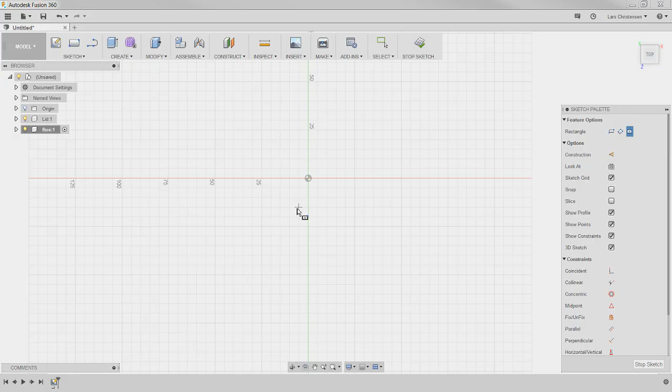If I want to do a center rectangle, instead of going up into the menus, I could just hit S and snap into the origin, and let's make this one 100 by 120 millimeters. We're gonna make a small little comfortable box here. Hit enter and we get it fully enclosed.

Q, press pull, and let's give this some thickness. Let's make it 25 millimeters.

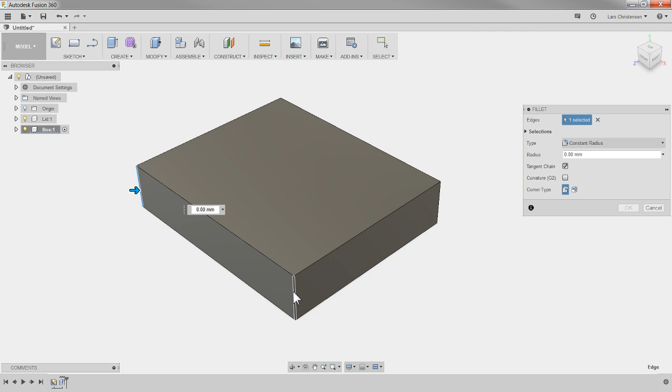Now that S key is aware of where we are. Before we were in a sketch environment, we got the center rectangle, but if I hit the F key again, you will see it's jumped over to feature, so you can add different things in here. Now you'll see fillet, so I can click on the fillet tool and add an outside fillet.

So like these 4 here, and let's make them 12. That's probably fine. We could also add a fillet to the bottom.

Again, you could hit the S key, and there you'll see it's sitting right there. Select the bottom here, and let's make that 2. Now this is not much of a box right now, but I decided to add those fillets now because I want to use the shell command.

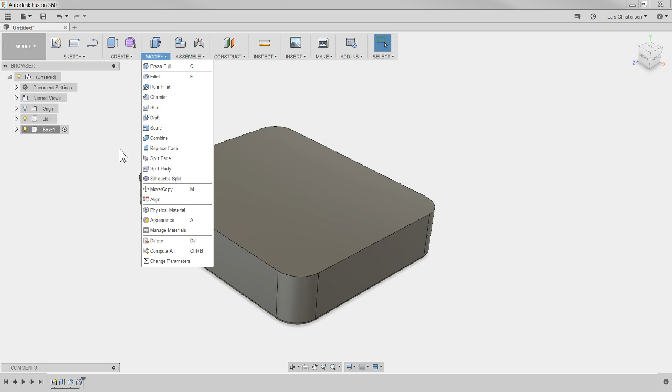Now the shell command, modify shell, but of course also S key. You could type in shell here, and you can see it's right here, and you could actually add it to that menu - now it will always be up here. So I'm going to select this face here, and then I can start adding some universal thickness to this one.

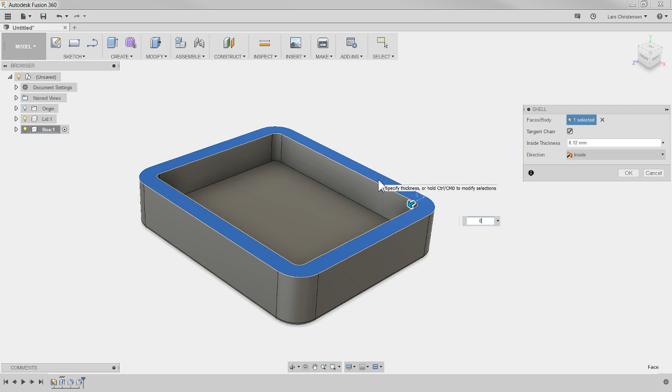Now I want to add an O-ring going around, because this is where this whole thing started - somebody asked me how the heck do you add an O-ring around here. So I'm actually going to make this thickness 8 millimeters. Now I've just added that thickness.

Now the reason that I added the fillets before - see, everything is down in this timeline - was because now you can see I got kind of like an inside radius in here.

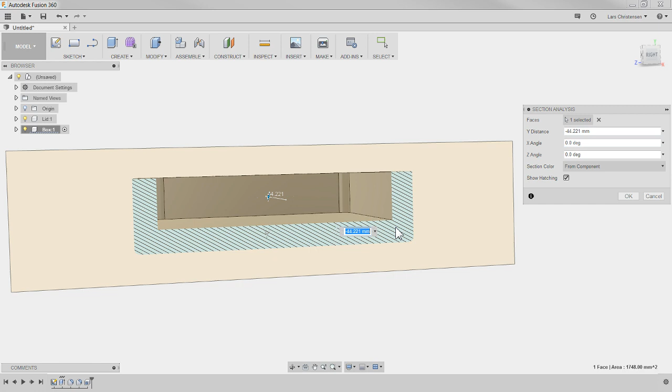Now if you go up here to inspect and go into section analysis and snap on one of these faces, we can now see that because we added that shell command, we now have a unified 8 millimeters all the way around.

Again, because everything in this timeline down here is history based, you can actually kind of break away and do new things to this.

So if I decided that I only really want the walls to be 8 millimeters thick, but I actually want the bottom to be thin, you could go in and hit Q again, and now it would actually be an offset face. You will see that in my instance here, it's only the bottom moving, but that's because I switched it around over here.

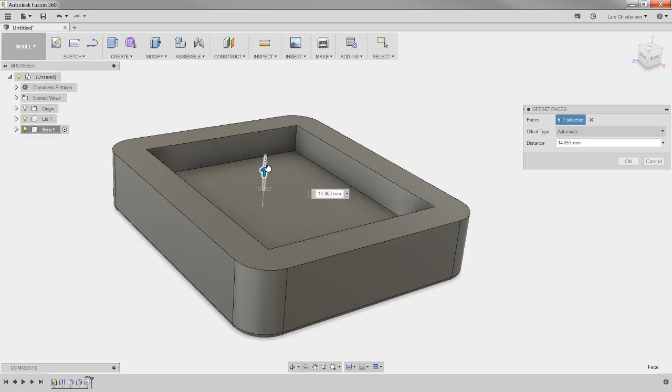Be aware of these menus over here. It normally would be on automatic, and then you will actually see that it also affects the side walls. So be aware, you can say a new offset, and now it's just doing the bottom.

So now I could go -5, and if I turn that section analysis back on, you will now see that the bottom is only 3 millimeters. The rest of it is 8.

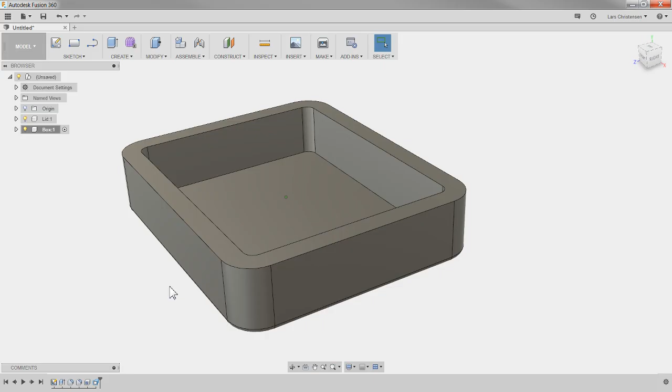So I hope that this kind of helps you think about how to work with some of this.

Now we gotta add an O-ring going around the outside here, and then I thought, well, that's pretty plain, and tomorrow we're gonna add a lid with a snap-on, and maybe sometimes there's kind of an indent in one of these. So why don't we create that?

I think you might have a tendency to look at what you have on the screen and think about how do I go from here. I don't know if this is good advice or not, but remember what has already happened in here - it doesn't have to happen from where you are right now.

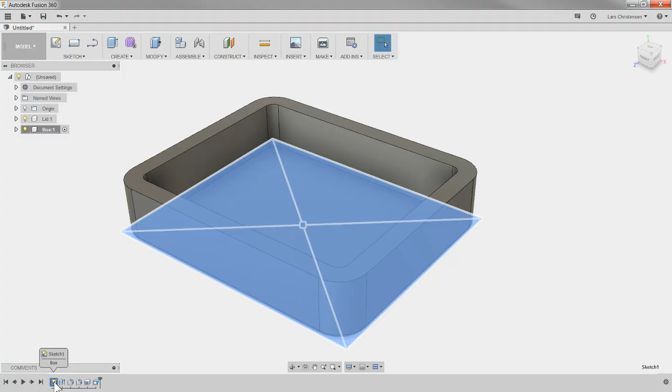If I go back into the sketch here, edit the sketch, now I'm back to the first sketch we did. If I go in here, for example, and hit the line tool and sketch a line from this midpoint to this midpoint, let's sketch kind of an indent that goes something like this.

D for dimension - let's make this, I don't know, 3 maybe? That might not be enough. 20, I don't really know, I'm just making this up.

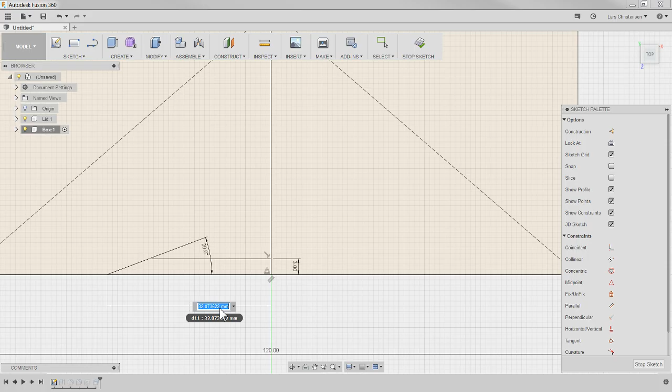So, 1, 2 lines dimension. Then we could go up here and do a mirror. Boom, boom, mirror over this line. This just saved me from drawing sketch mirror, saved me from drawing the whole thing over.

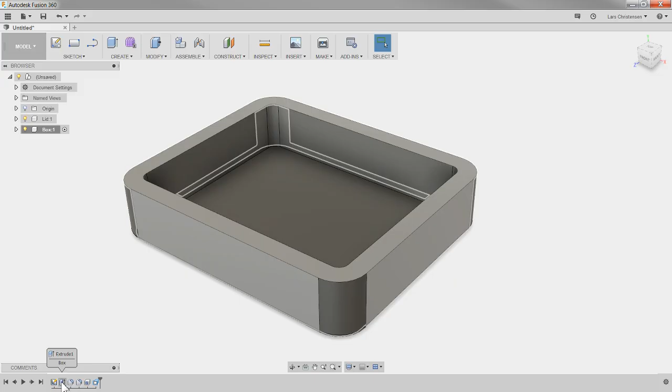Now when I hit stop sketch, nothing changed. You're like, well, why didn't anything change? Well, nothing changed because this extrusion still is looking at the original sketch. If we edit that, you will see that it actually noticed there are 2 more profiles created in here.

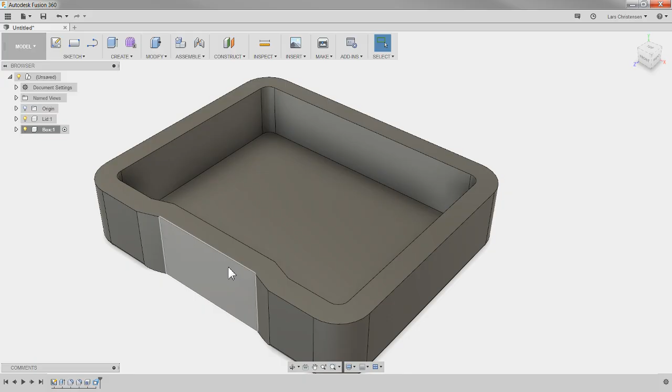If we select this in here and hit OK, then you will see that we get a nice indent here where maybe our clip will kind of fit in there, like a thumb kind of thing.

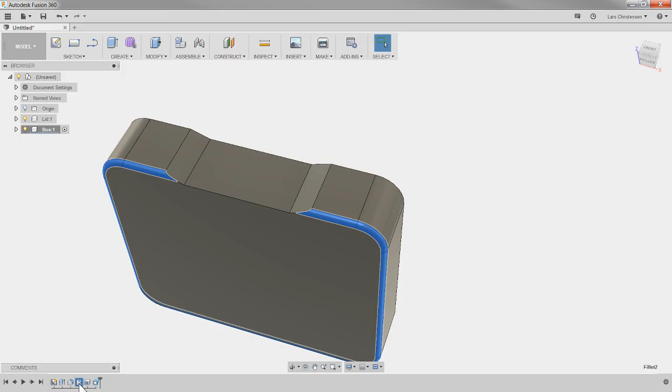Now be aware of one thing here though. Look what happened down at the bottom. Because it changed things, the fillet didn't follow along. So you want to kind of keep an eye out for those kind of things, because it lost some new edges created, and those edges were not in the original selection. Of course, you can just go in and select them again, give them some kind of radius, and then you will see that now it is how you maybe want it.

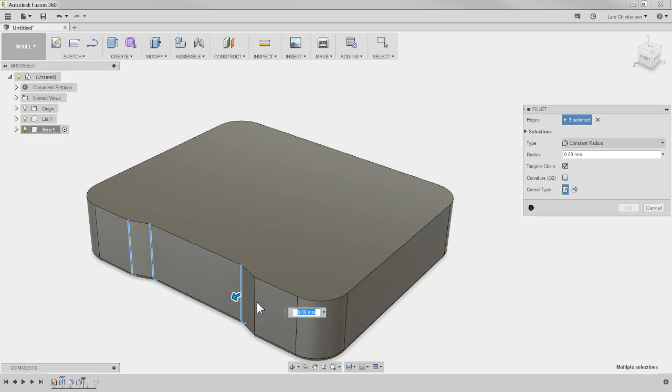Also notice we don't have any fillets on these areas here, so what I would do is move my history line back, and then we could hit the F key again to get that fillet tool, and add a couple of fillets to these here. I don't know, maybe 8. Looks pretty good. And then move forward, and we kind of got a nice fillet on that area.

Never mind. So now the reason I did that was because now my fillets are kind of bunched together in here. It's kind of nice if your timeline is getting really long, sometimes it can be hard to get all that together.

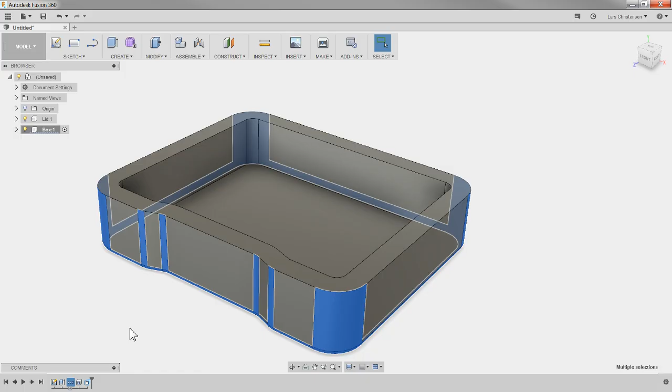Actually, if your timeline gets really long, one of the tricks is you can select these fillets here, these 3 fillets, right click, and you can actually create a group right in here. So now you have a group. We can expand the group, get the fillets, minimize it, makes it a little bit shorter, and rename it. That's maybe a little tip there, I don't know.

Another thing I had on that model that you saw before we get to the O-ring grooves: many times, if you're doing plastic parts at least, and I'm not a plastic part designer by any means, you will see that I made this wall 8 millimeters thick. That is great for where the O-ring's gonna be, but maybe you don't want it to be all the way around. You could go in and use a revolve.

Well, not the revolve, the sweep. But before I do the sweep for that, let's just do the O-ring groove, because that's kind of in the title, and now I'm almost 15 minutes into this thing. So let's talk about an O-ring groove. A couple of people have asked me about doing O-ring grooves in something like this.

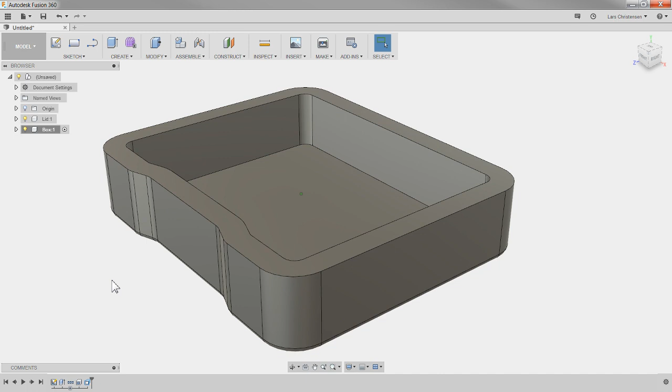So I have done O-ring grooves in the past a lot when I did plastic injection molds, but I want to make sure people understand that O-rings can be kind of tricky depending on what you're doing with them, because some of them, especially with plastic injection molds, there can be heat zones, hot zones, and different things with that. And when I did O-ring grooves back in the day, it was definitely machine shop style O-rings. We had a couple of thumb rules. I'll share those with you in a second.

There are some people in here who know a lot more about O-rings than I do. One place is the Machinery's Handbook, there's a section about O-rings if you want to be specific. Also, if you go to O-ring manufacturers, they will many times show you specifically what the sizes should be. So I wanted to make that clear, because I don't want anybody to come to me and say your O-ring dimensions were not real.

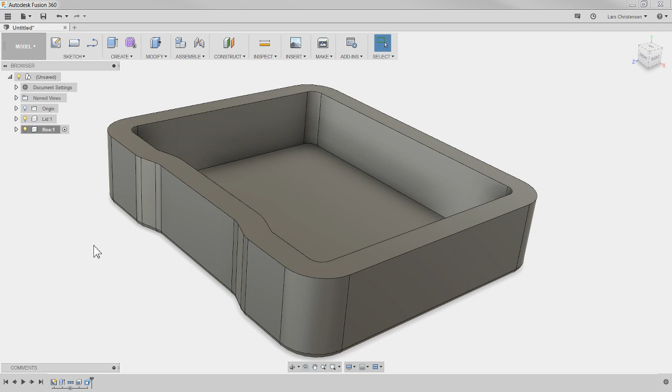So let's put an O-ring into this. I'm going to run an O-ring around this top face here. We're going to put in a 2mm O-ring. I'm going to show you a neat little trick with that too. So I'm going to create a new sketch, right in that plane that cuts through here.

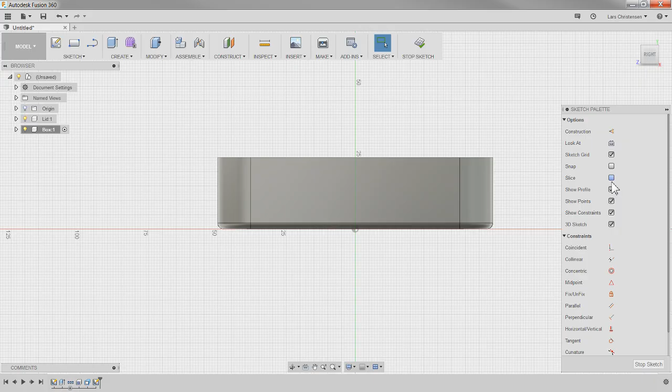Somebody was asking me on a live stream the other day what slice does over here in the sketch palette, and I said I don't really know, I'm going to use it. So let's click on it. Look at this, it actually does a section view right where that sketch plane is, so now you can actually see where you're going to sketch. Isn't that nice? I don't know how long I've been using Fusion and I haven't used that.

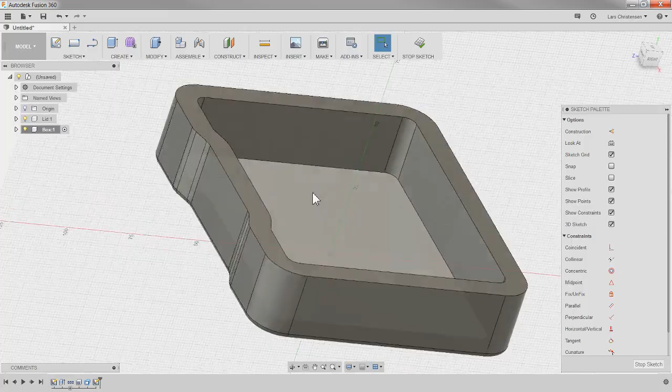So that's the slice sitting right over here. Normally you'll be sketching in the middle, because we're sketching right in the center of the box here. You can see that on the plane. Why not turn the slice option on? That looks a little bit nicer.

Okay, so let's sketch an O-ring groove. Now I'm going to do this on purpose, and I do this a lot, especially if you're fairly new to Fusion. If you try to sketch where there's other geometry, you have a tendency to snap to things you don't want, and that can be a little annoying.

So what I'm going to do is create a 2-point rectangle. I'm just going to sketch out in space out here. Now the first dimension I get is the depth of my O-ring, so this is going to be for a 2mm O-ring.

There's going to be a little bit of pressure on the O-ring on the top, normally about 20%. So we're going to make this one for a 2mm O-ring, I'm going to make this one 1.6. Now, don't sue me, this is just a good rule of thumb kind of thing, depending on what you're going to use these O-rings for.

The second is the width of it, and you would normally make the width a little bit longer, so when the O-ring is compressed from the top it has to go somewhere. So this is 2mm, so I'm going to make it 3. I looked up some different websites and they would say that's a lot, but that's kind of like my rule of thumb right there.

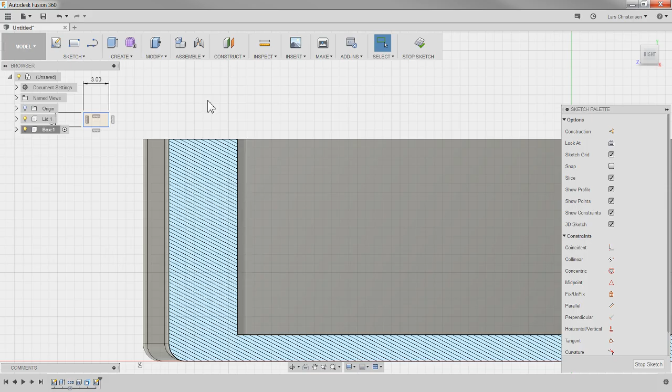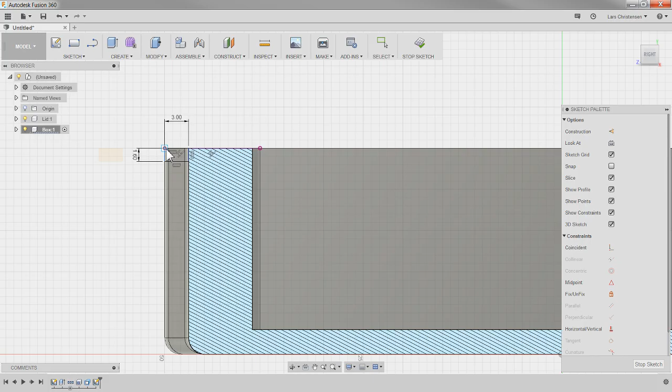Now this rectangle is kind of floating around in space, but we got things narrowed down a little bit. I'm going to hit P for project, and project that edge right there on the top, because I'm going to use that with the collinear constraint and say make this one and this line collinear. Right now I've added a relationship there, and now this thing cannot move up and down, but it can move along.

You can see, as I'm moving over here, there's going to be some triangles and things popping up, and that's because it's trying to snap into place. You can hold down Control while you're moving it, and then it will not use that.

Now I'm just going to move it all the way over here, and then I'm actually going to place a dimension from this inner edge here, from this edge to this point right there. And I'm going to make that 2.5, because my math tells me that will place that rectangle in the center.

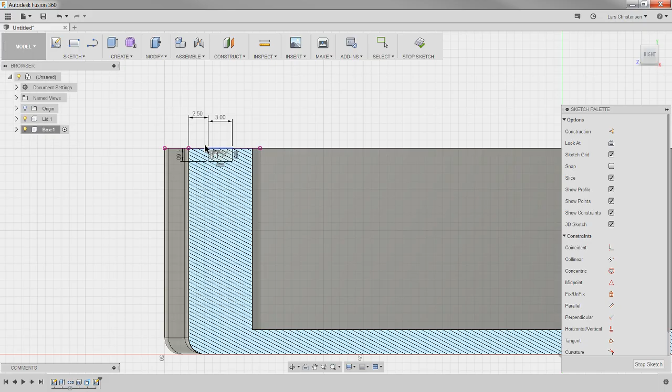I hope this was useful if you are fairly new to Fusion, to see how many times I'll draw things up if it's going to be interfering with other things. All right, I'm going to stop sketch, and now you can see that sketch is sitting in there. We're going to use the sweep for this.

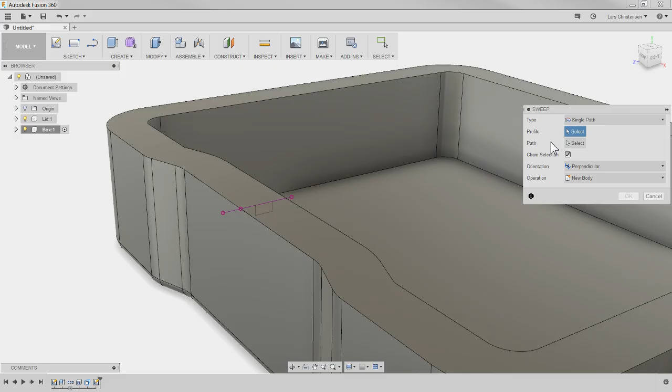So the sweep needs, well, it needs two things: a profile and a path. And if you ever watched any live streams from me in the past talking about the sweep, I might have said it needs 2 sketches. It's actually not true, so I apologize that I lied to you. But it needs 2 things.

It needs a profile, and that's the one we drew up there. Now if you ever have a hard time picking the profile, like it's kind of hard to select it through here, just hold down your left mouse button for a few seconds, and this little dialog will come up, and then you can see the profile will show up right there, so you can select that.

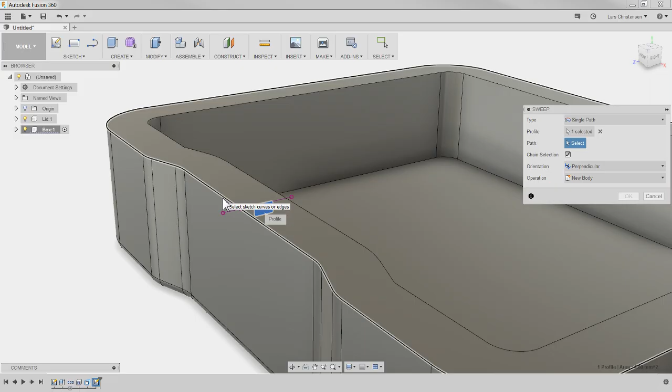And then we can select the path. Now the path is actually just an edge that it can follow along. So if I select one of these edges, I can select this one in here and it stops, but this one out here seems like it will select the whole thing. That's a little bit easier.

Now you will see that it selects the whole outside as a cut, and then we have that O-ring groove put in there for the 2mm. Excuse me, still fighting this cold.

So I think this looks pretty dandy so far for a little bit of a box. Now, like I said before, many times when you're seeing this type of boxes, they're actually not keeping the outside wall 8 millimeters all the way around. They're really only doing it where the O-ring needs to be.

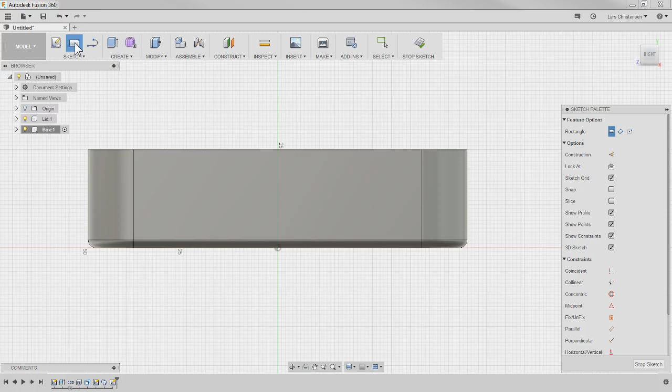So you could go in and start another sketch on this face here, and you might just create like a 2-point rectangle that could be, see, now I have this radius kind of in my way for this intersection. Or we could do something like, I don't know, let's make that 20, tab, 5. That will give us, I think, the same thickness as we had on our other one there.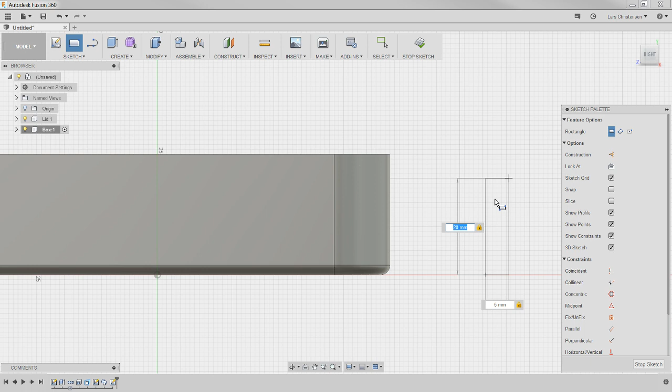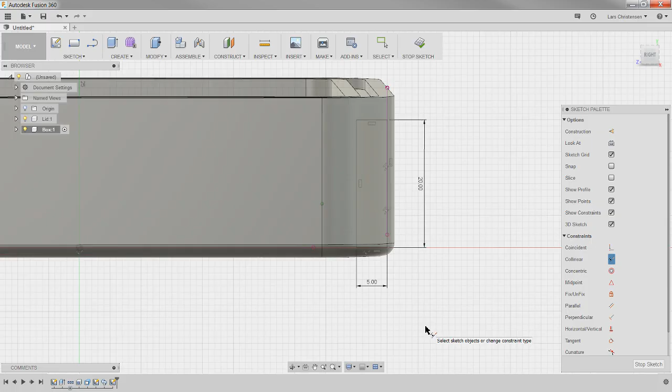And we could go in and attach this edge to this edge, grab a corner. We can see here it can move up and down, so we could do another collinear from here to this edge, and then it's locked into space. Now I drew that on the back side here, and then we could go in and use the same function we just did and cut with.

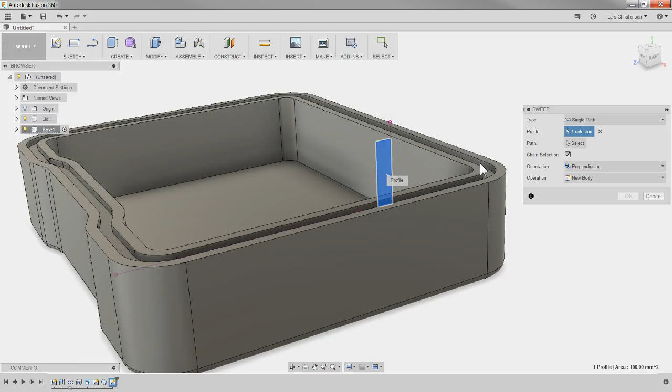So if we go back into the sweep command, and again select a profile, that's going to be that profile there. Now again, you see how that face is in the way? Hold down, you can select that profile there, and then we could select the path for this, and I can select the whole outside. Actually, I think I'm probably just going to select the inside here, so I get it to right about where that thumb thing is. Let's hit OK to that, and you will see how that happens.

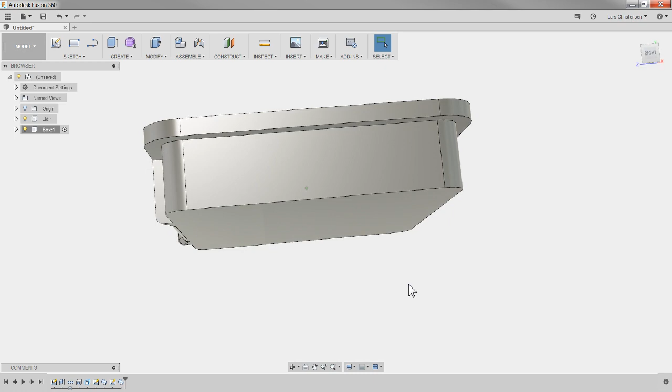Now, you see how our radius in the bottom got cut. And I did this kind of on purpose to show you that everything down in the history here will go in the order of us creating things.

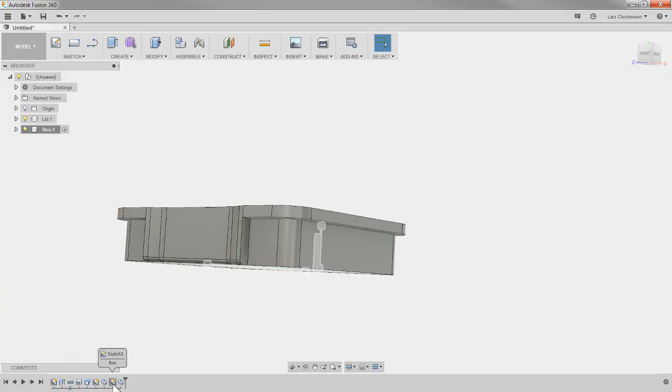Now, you can actually move things down here in the history tree to different places. So if we go in here to this group, I can right click - do I delete the group? Is that deleting the group, or is that deleting the fillets? Oh, look at that. Delete group and expand its content. Delete both group and its content. Oh, I didn't even know this. Group delete. Let's delete the group here.

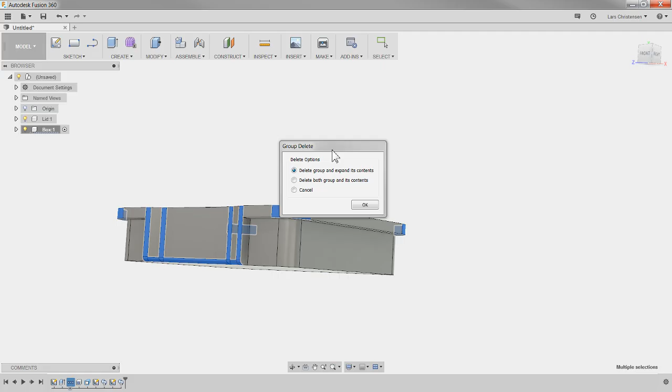All right, so we have some fillets there, the fillets that go around there. I don't know if I can move it. I can't move it behind it because it actually used that fillet as a reference for that line there. What I could have done was, what I should have done maybe, take that fillet and delete that.

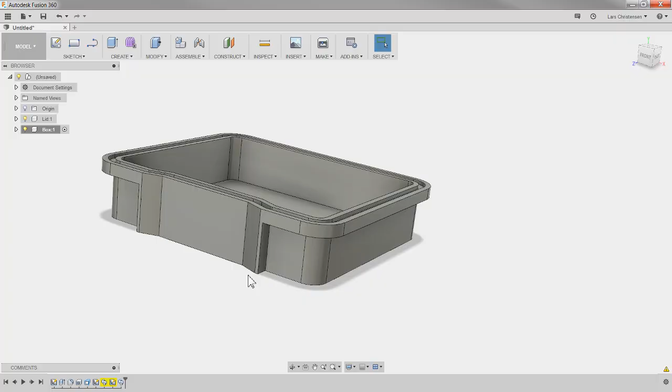Okay, and if I delete that fillet, notice what happened here. This is one of the wonderful things - why I love doing these in live streams. I deleted that fillet, and look what happens. Somebody right now is clapping their hands. This always happens to me.

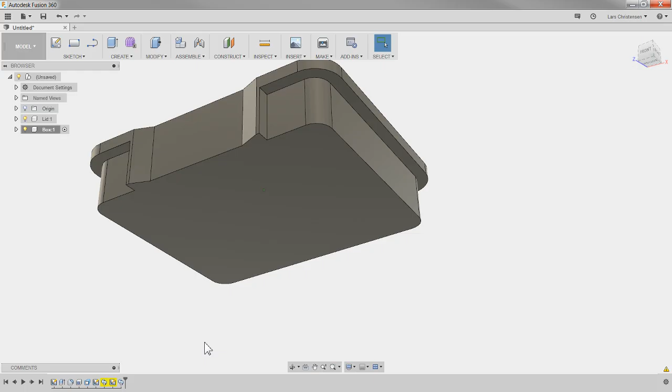So what happened was I deleted this fillet down at the bottom in a fast movement, and now suddenly these are yellow because they lost their references. So what I'm talking about is that when I created that cutout here, I projected that bottom edge to make these two collinear with that. Well, that bottom edge was coming from where that fillet ended. So now that I deleted that fillet, I kind of screwed myself up a little bit.

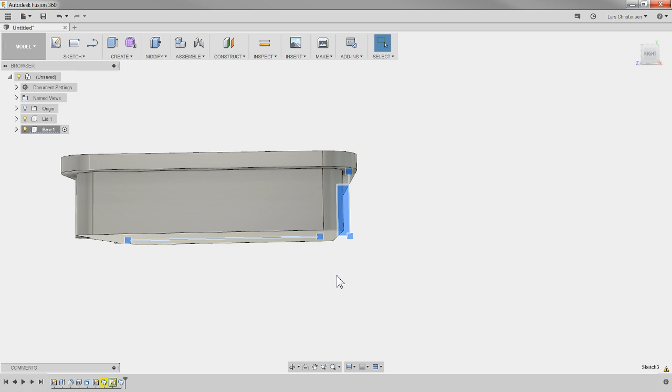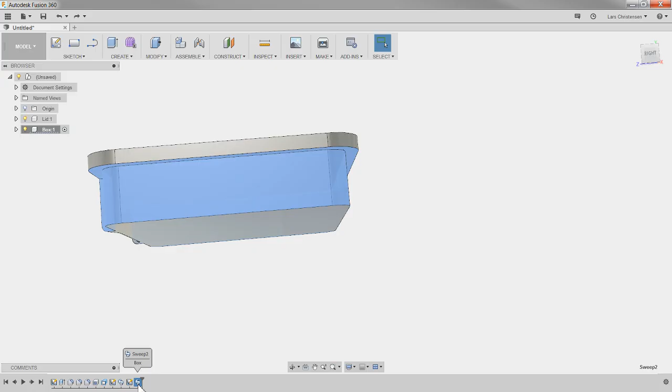Now I'm going to do a Control-Z to undo that, and you should really do that as a habit. Whenever you see those yellow ones, don't just move on. Stop right there and say, how can I fix that? So one of the ways to fix this would be to say, all right, adding this cutout right here, that might not be the smartest thing.

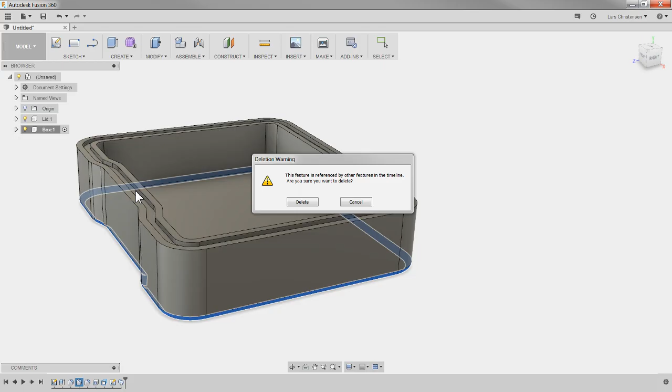Now this groove here, was that the one that was alarming out when I deleted it before? Let's delete it. See, it says here the features are referenced by other things in the timeline. So if I delete this one, then it actually will also mess up this reference on the outside. Now what the yellow means is that it just lost a reference.

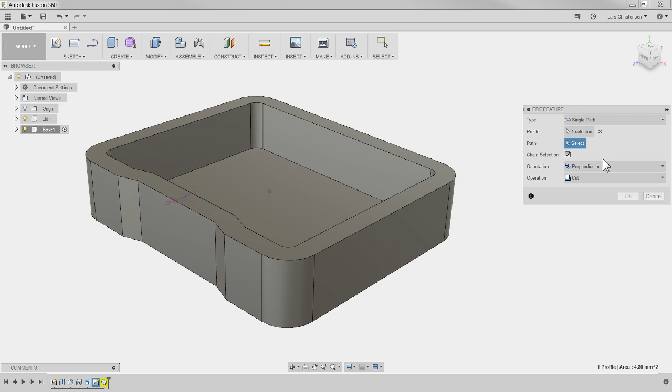So I can actually edit the feature here, and I can probably find out what happened - it lost that reference on the outside on the profile. So if I reselect that again and close this up here like that, then that feature is actually perfectly fine.

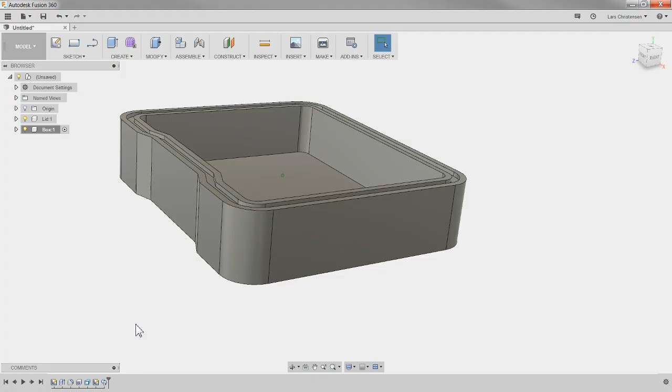So that's one thing to know, that if you ever see them yellow, it's because it lost a reference, and many times you just have to go in and select something again. Now, so what I wanted to do with this fillet on the bottom, I actually wanted the fillet to happen after I have done the bottom cut.

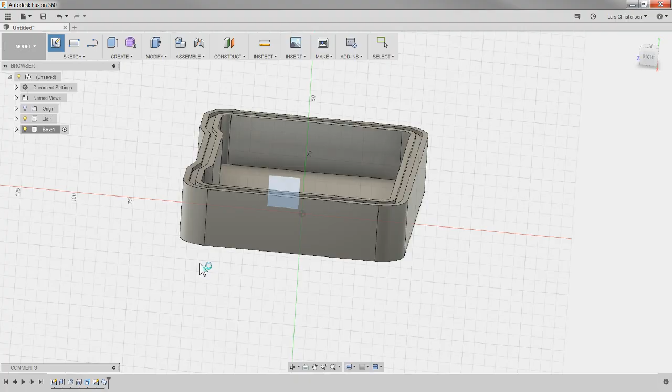So let's do that cut again, right? We can just go in and now we don't have anything down here in the bottom. So now we could actually just probably sketch something up here. We made it 5, we made it 20, like that there, right? And let's go in and do a sweep.

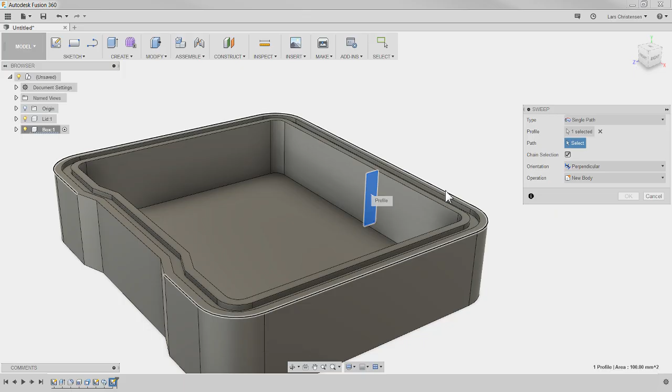Hold down so we can get the profile, select the path, and again we can select the outside or the inside. We'll select the outside here, and we get the cut there, right?

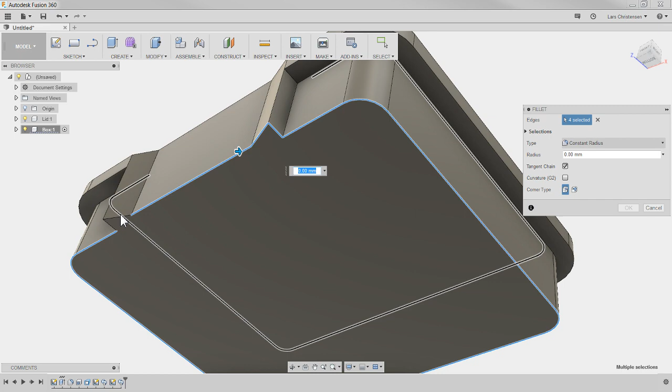And now I can add the fillets. Now the fillet's not going to be all sectioned together because of the way I did this, but that was just to show you that you could actually put them together. So I'm just going to select these different edges here, and the fillet we added in there was a 2 millimeter one.

And then I might also want to do a fillet on these edges here. I think I like to keep that front face thick because tomorrow we're going to put the lock on for the lip. But now we've created this lip here, and you'll probably also put a fillet underneath here because this will never be sharp, for strengthening too.

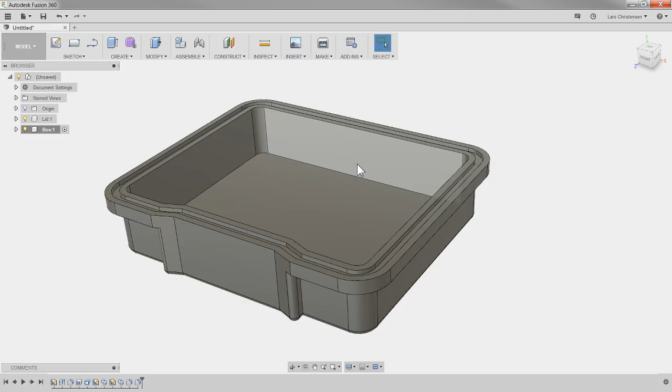I hope you get the idea from this. The last thing I wanted to show before I end this, and I hope this gives you some tips and tricks and shows how I worked through some of this stuff, was how I did the ribs in the center here. So I'm going to open another sketch on the bottom of this part here.

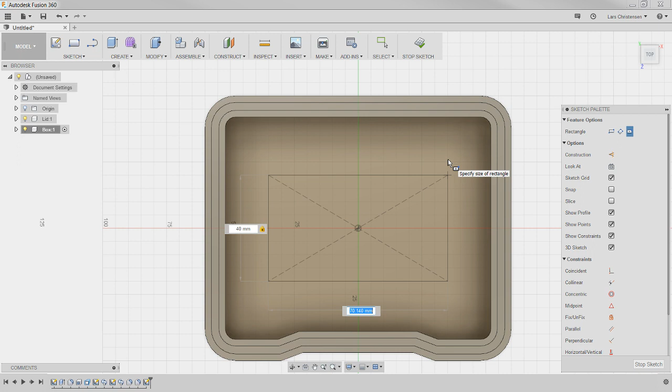I'm actually going to do another rectangle. So I'm going to hit the S key to get that center rectangle tool. And I'm going to draw a rectangle out here. Now, I don't really care about the length, and I'm only going to care about the width. I'm going to make it 40, like this. And then I'm actually going to draw a line from the midpoint here to the midpoint there.

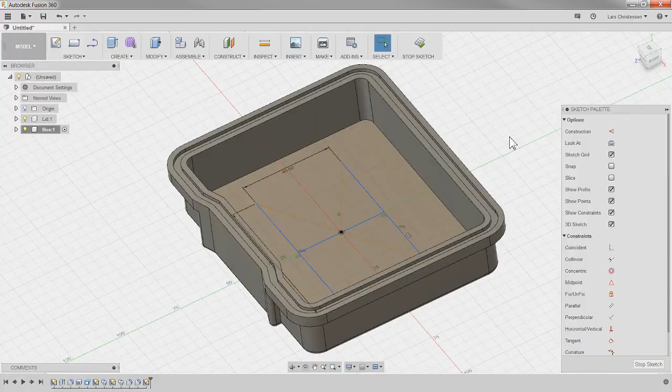And I'm going to do something really bad. I'm going to delete these two edge lines. So now I have kind of like, what is this, like a metal beam? Kind of like a railroad track kind of beam here. But it's underdefined, notice that. I haven't put any dimensions on everything of it. But here's the neat trick about that.

And that is there is a web function inside of Fusion here. So I can go in here and select these different edges, these 3 edges, holding down Control to select them all. And if you give them a thickness, then you get the web here.

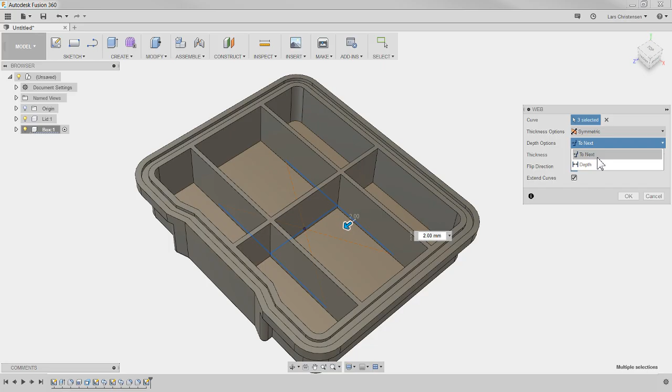Now there is actually also an up-to-next option, and then there's a depth on these. So you can actually control, like many times they will not go all the way up to the edge. They will actually subsize a little bit under, like maybe 20. And then you get that division in there for the box.

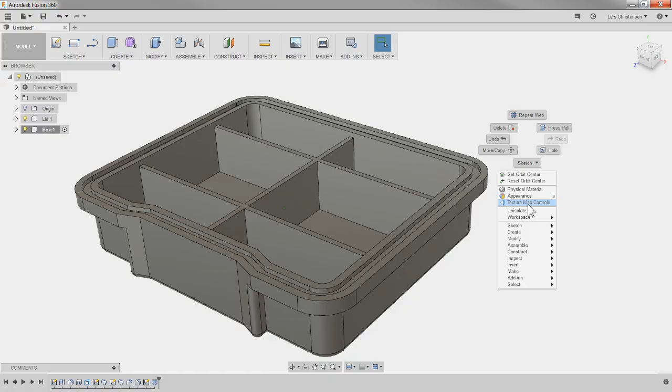So the last thing I did with the model you saw earlier, as I normally like to do, is just throw a little bit of appearance on it, just to make it look a little bit more pleasing to my eye. Many times I actually do that before I get this far into the project.

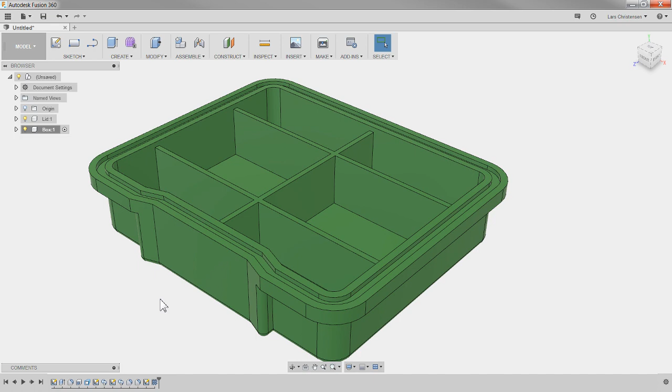I hope this was helpful, and gives you an idea, depending on where you are in your Fusion learning experience. If you're brand new, or came in a little late, notice we're going to continue on this part tomorrow, where we're going to add some hinges on the back, and then add a lid with a latch that's going to snap in. Like this is one of those dividers you have your screws in, or your fishing gear. I don't know. But this hopefully answered a couple of questions regarding the ribs, the web in there, and just some small thought processes for modeling things.